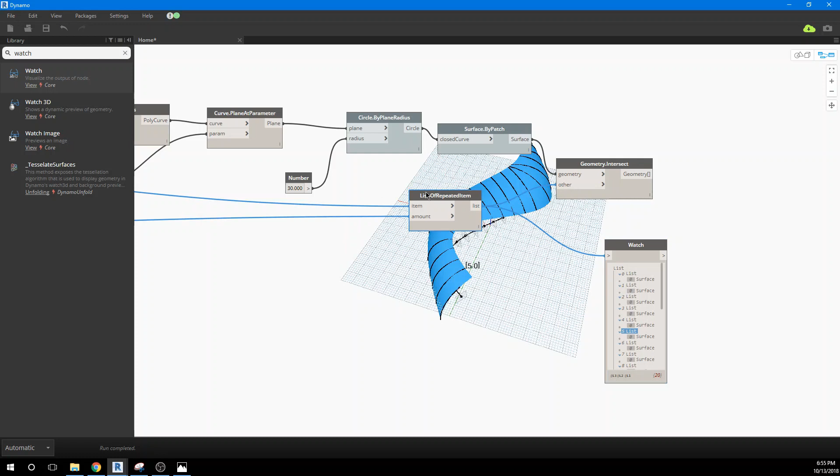Okay, so before we start making the beams, let's turn a few things off so we can see what we're doing here. Let me turn the surfaces off.

Want to get down to just lines. I'll zoom in here a little bit so we can see these. So now we have our ribs tracking relatively close to our surface.

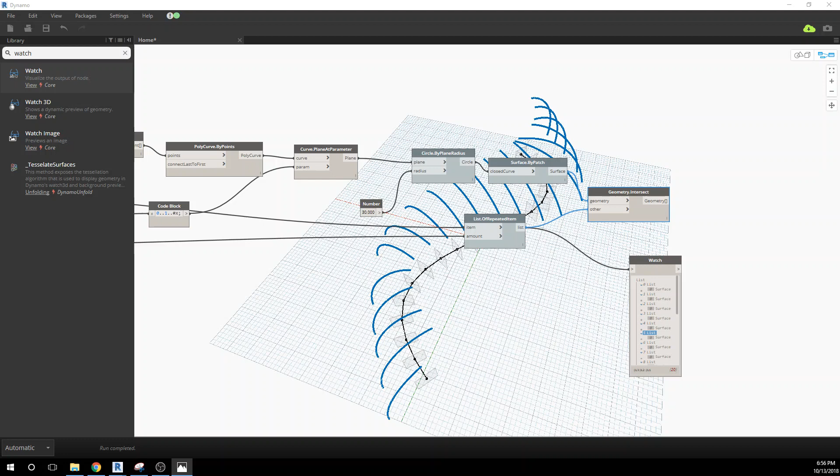And we want to turn those into beam elements. So if that's our intersected geometry, it's a curve, and we're going to now thicken it up. First, we want to have a little bit of control over where it sits with respect to the roof plane. We don't want these to show up in the roof plane, so we'll go ahead and offset them.

Let's see which one it is. I think it's this one. Offset a curve by a distance. So we'll go ahead and grab that geometry. Let's see, I don't know if this already has a default value of 1.

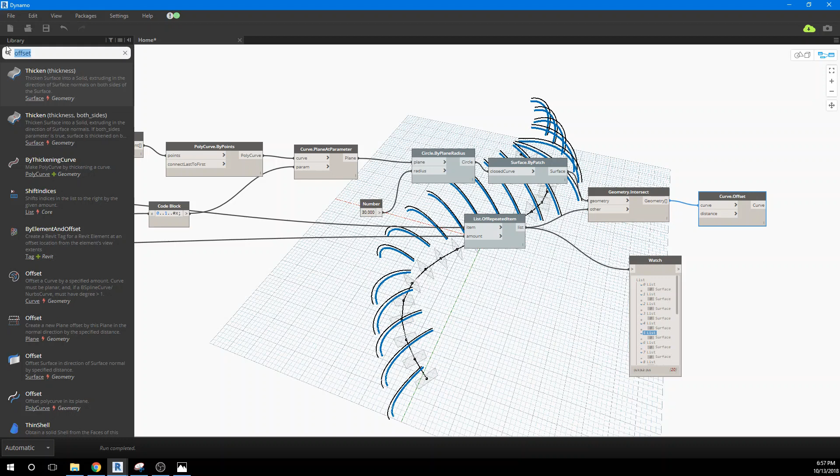So here's the original geometry, here's the new one, kind of a subset that would sit underneath that form if it was still on. And we're going to make it very close. I'm going to grab a number or just copy this one, and we're going to make this very small.

I think I did 0.3, could even be closer than that. And it'll move that line very close. We'll turn this line off now because we no longer need it. So that's our new beam coming 0.3 to what would be the defined surface.

And now we want to actually thicken this up. So we can do this a variety of ways, but let's look at polycurve, and then thicken.

And I wanted to only do it one side, so I'm not seeing the right one. I have ThickeningCurve. I'm not getting all the choices I should here. Let me think what I got to add to this - polycurve.

I'll do it by... thicken. Thickening curve, sorry about this. And I'm not getting the option for both sides. Oh, wait a minute.

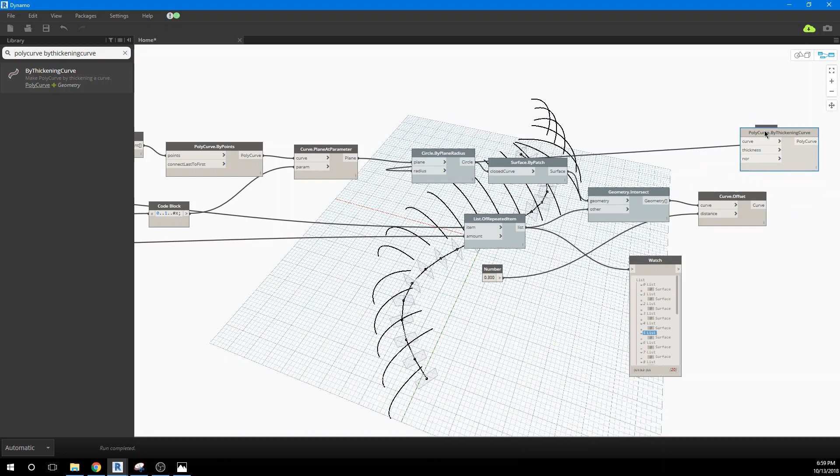It does give you a normal. I'm sorry, I probably had the right one right away. It gives us a... no, it doesn't. Oh yeah, it does. It gives us a normal so we can go in a direction and a thickness.

All right, so I don't know why this got stuck on all the way over here. So let's take and feed the curve in here. Let's give it a thickness, copy a number over. We could make it 6 inches, 0.5 feet. And we need a direction, so we need a vector.

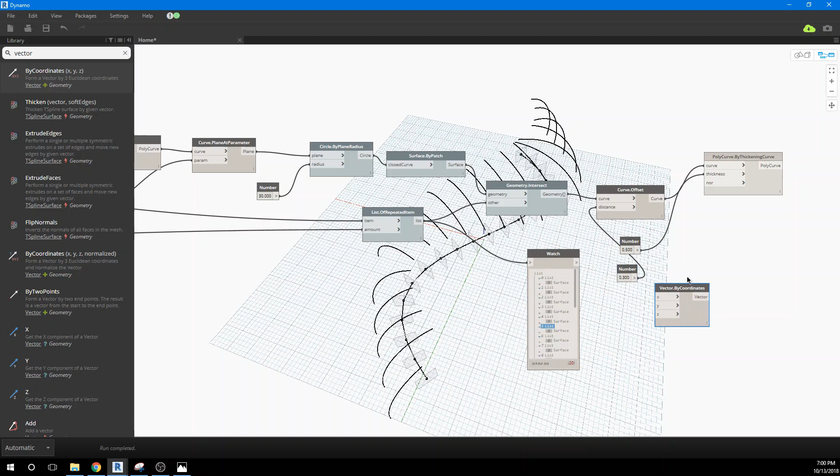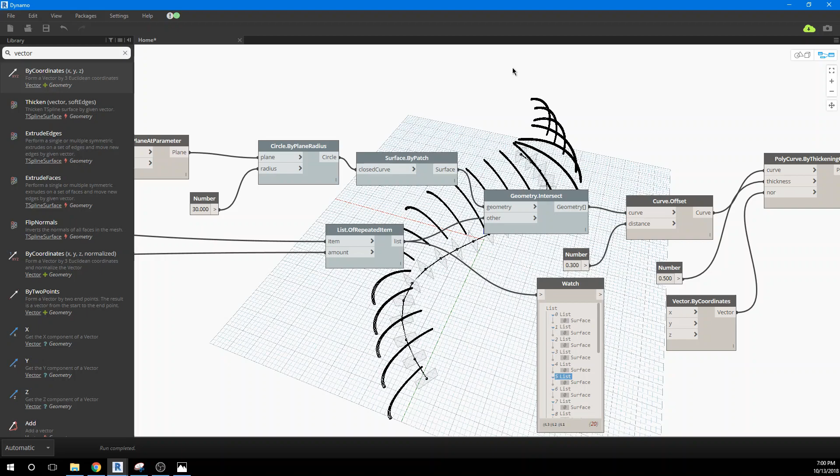I'm not exactly sure what we got here. Let's zoom in a little bit. So the polycurve is on both sides of the line.

That's a bit annoying, so let's just compensate for that for now, just so we keep moving through this. If you can think up a better way to define this - usually this thickening gives you both sides or one side, but I'm not finding that function.

So instead of this being offset by 0.3, we could offset it by 0.5. Well, we're actually going to be offset enough - if I was to show the form, it probably won't show through.

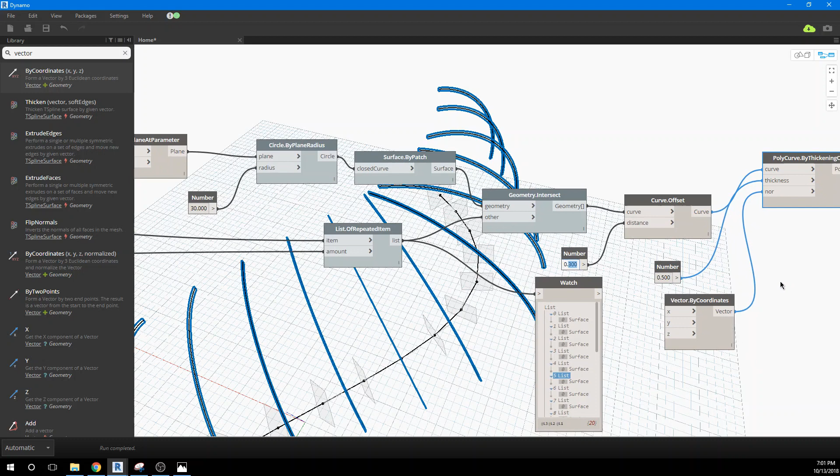I'm going to just leave that for now, just so you realize that the polyline - let me just zoom in here - the polyline we're creating is just extruding up and down, and we put it 0.3 away, so there's still some clearance for the form. So if our ribs are actually showing through, we know how we would compensate for that.

So we have a thickened curve, and now we want to just make that a surface. So we'll do a surface by patch.

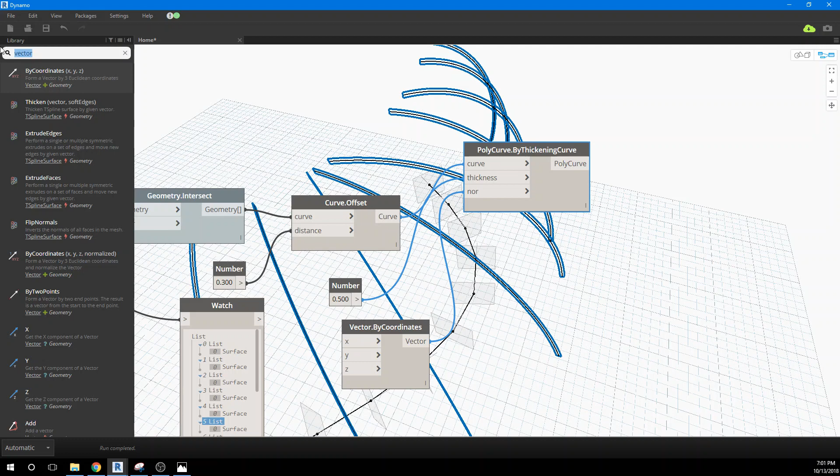Now that's a solid. Let's go ahead and start turning some of this off. Let's go back here and get rid of things we don't need to see.

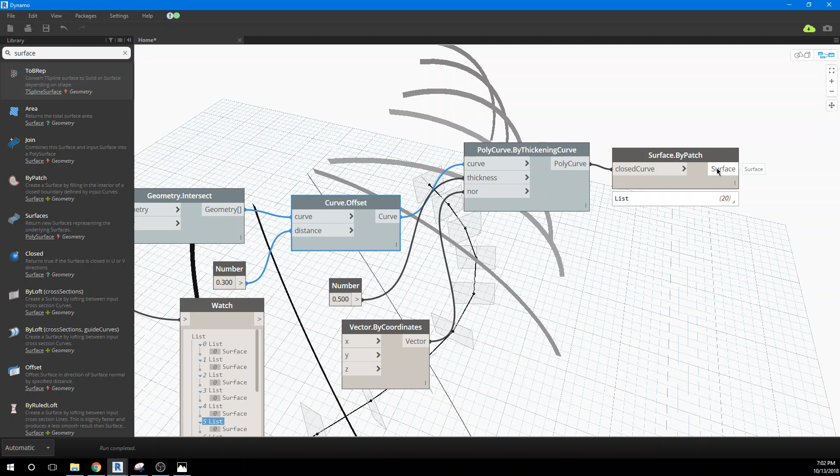Now we have that thing as a thin 6-inch piece of rib, and it's a surface, and then we can thicken a surface also.

And this is where we get the option for both sides on this function. So we'll plug the surface in, and I think that'll run it right away, and that'll make it a default of 1 foot thick.

So we want to actually make a smaller number for that. So we'll go ahead and copy over, and we'll make this 0.2, which would be a couple inches, basically, a little under a couple inches.

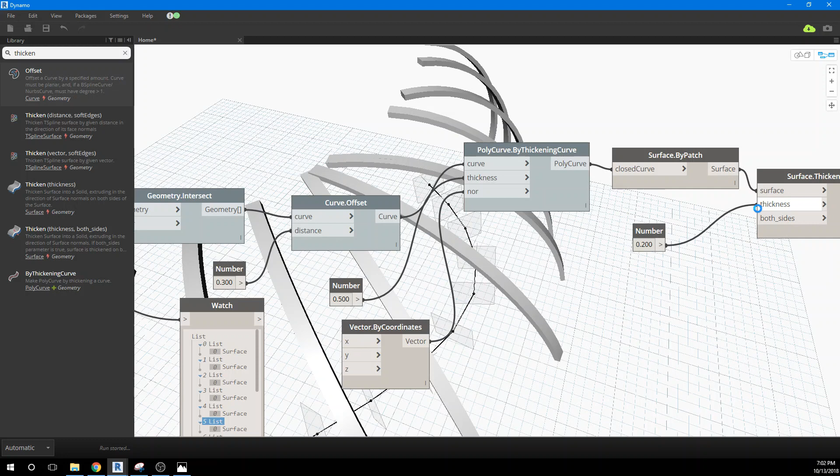Now we have our ribs turned thin, and we want to make it so that it's on both sides, and see what the default is. It's funny how this number thing just jumps over when you click on it again - it's a glitch. And it's true that it's on both sides, so we don't actually have to create the Boolean input for that one.

Okay, so actually we've actually created now all the ribs for our structure. The next thing we want to do is start to look at creating these purlins, or the cross members for that. And we're going to use some of the same geometry.

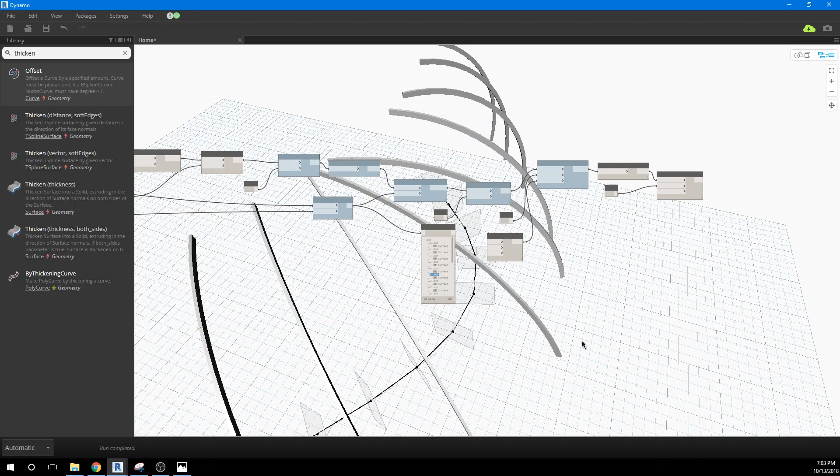What I might do here is let's turn the beams off. I'm going to turn the beams off for a minute. And I want to turn it back on where we have this geometry intersect, because that's just a line.

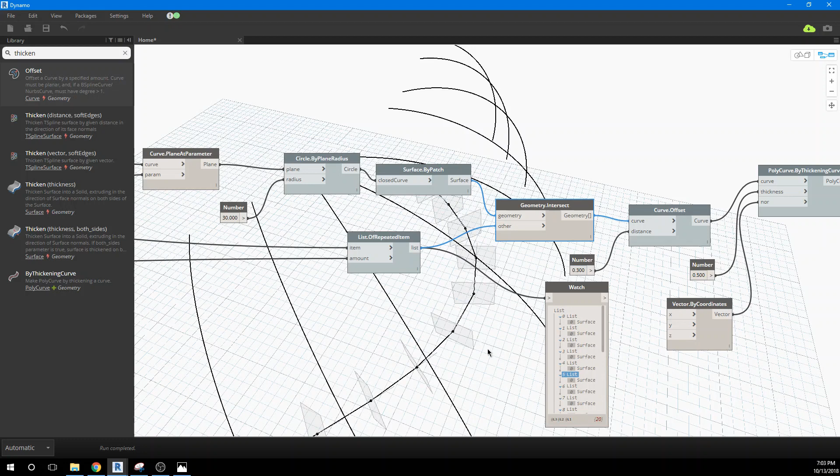Okay, so that's the geometry that we're going to use now to create the purlins. So we're going to do another curve offset just to get them away from, just to get some control over that. And I'll just repeat using this element again.

Actually, I'll grab all of these. I'll grab these two, and I'll do copy and paste, and slide these down.

And I'll preview this. I'll turn this one on now. So we're seeing those are just down there. That just gives us a point, it gives us a little control over making sure that where they sit with respect to the beams that we construct.

And I can turn off this geometry now because we no longer need it. This is our reference geometry that we're going to divide up in order to create our purlins.

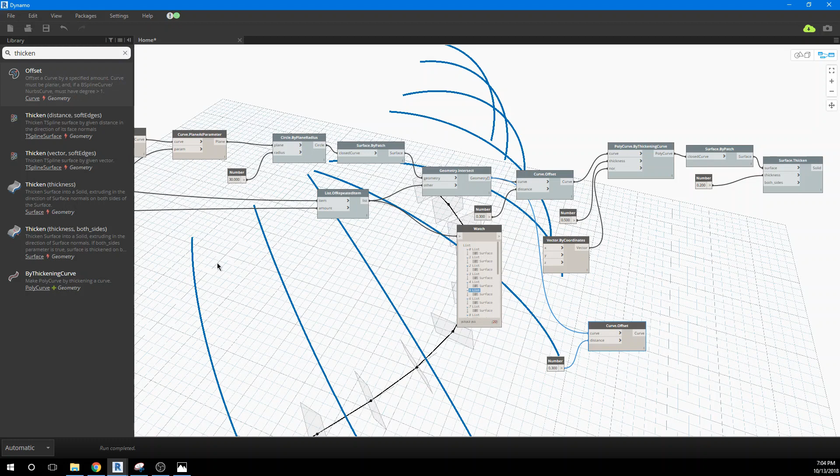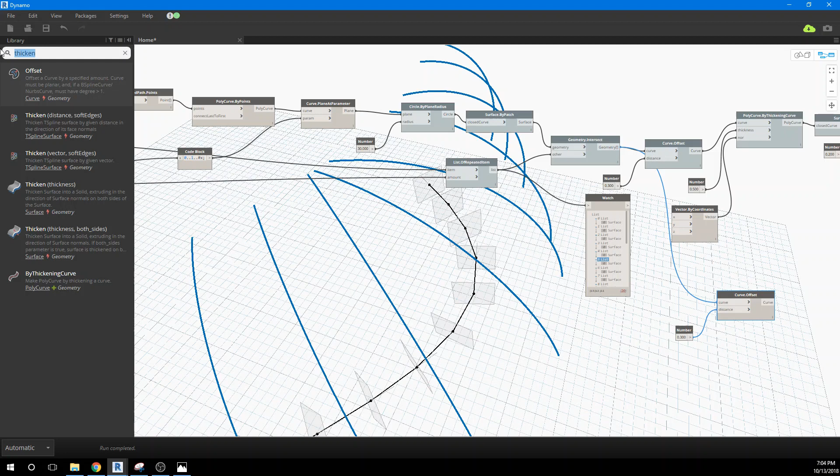So we're going to do a curve points at segments. I don't know if we still have that up here. No. So let's grab...

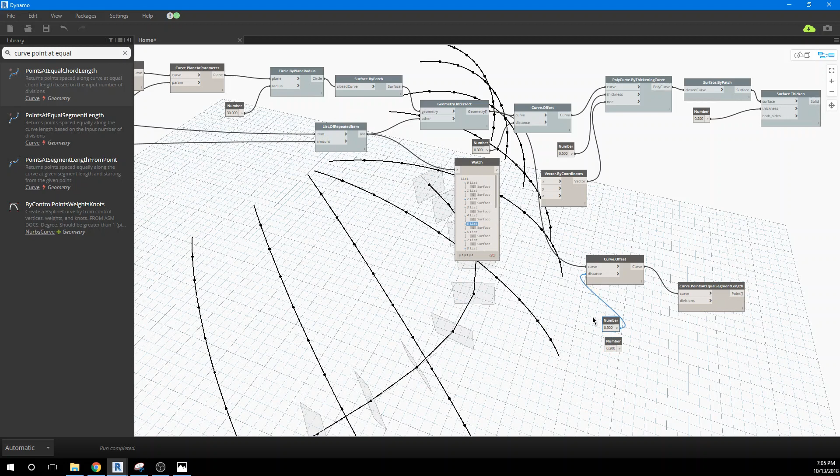at equal segment lengths. And so the idea here is we're going to stick the curve in. We're going to grab a number. And it did that glitchy thing, so I'll go back over there. And I think I made, for this one, I think I did 6 divisions. That'll give us 5 points.

All right, so the default is 10. I'm changing it now to 5 points. 1, 2, 3, 4, 5. And that's 5 times 20 ribs is 100 points. So we have 100 points now.

And this is where we start to look at the idea of how we really want to connect rib 1, point 1 with rib 2, point 1 with rib 3, point 1. We want to make these purlins go all the way across. So this becomes a manipulation of list in order to get our organization oriented the way we want it. I don't have a better way of saying that right now.

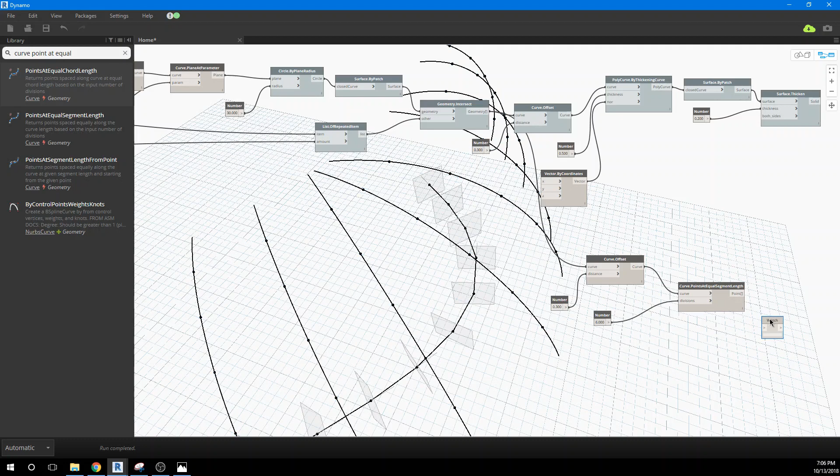Let's take a look now at what comes out of our data. I'm going to grab this watch box. I'm going to pull this over. And what we have is we have lists of lists.

Each list has 5 points, 0 to 4. So 0 is included as like 1. So 1, 2, 3, 4, 5. And we have 20 lists of those.

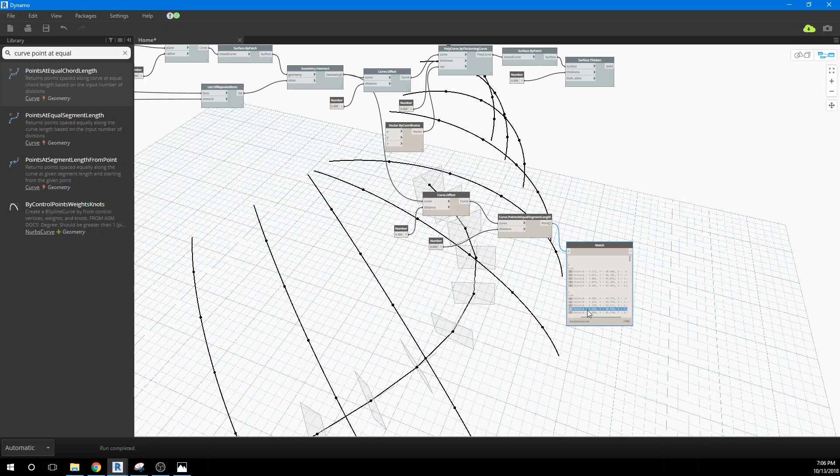So each one of these, if I click on one of these, I don't know if it'll show up on the screen, but that'll highlight one of the points in our system. Let's see if we can just back up enough to make sure we can see them all. So there's that point I have highlighted.

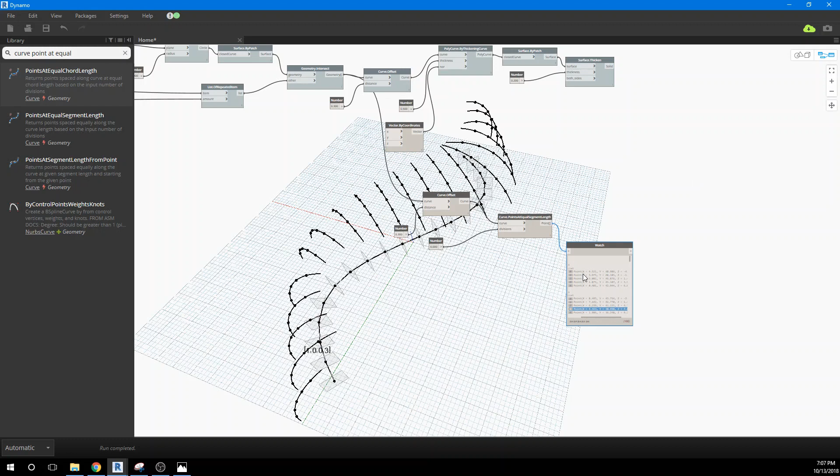So if we went through, and you see as we click through this, we'll get every point on each rib. And what we really want to do is be able to connect this point to this point to the next one down. So we need a way of parsing through our list in order to get the elements that we want. And so I've come up with a strategy to do that, and it's maybe not the best way, but it's a way that I could understand as I work through this project for the first time.

So I'm going to take this list and flatten it down right away. So instead of having a list of lists, I just have one huge list.

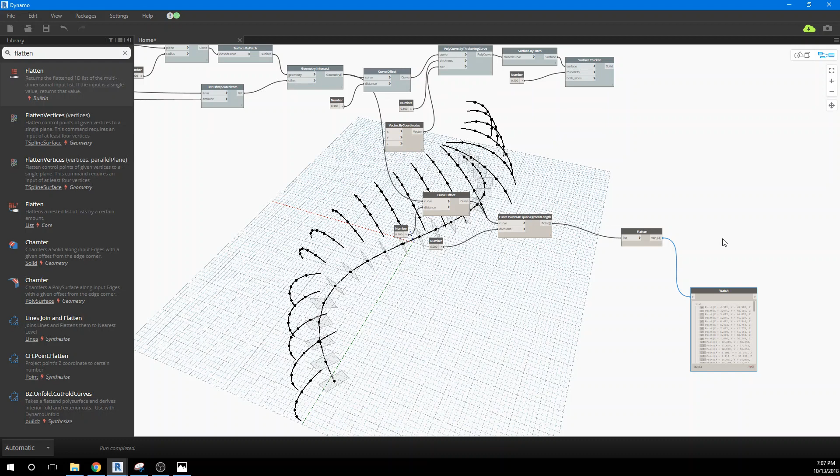So now I have 100 points. Let's zoom in here a little bit. It's the same thing though. If I grab this point, I get the first one, and if I go down to the 5th point, I get the next one in the series. If I go down to the 10th point, I get the next one. So I have to step through every 5 numbers in the list to get all the ones coordinated to be that element.

So there's a few tools for that. I can take every item out of the list at a certain position. I'm going to do a list take, it's called list take, every nth item. So I'm going to plug the list into that, and I want to grab every 5th item.

And so if I go through the list now, I've got every point through that whole list. So let's go ahead now and make a line out of it.

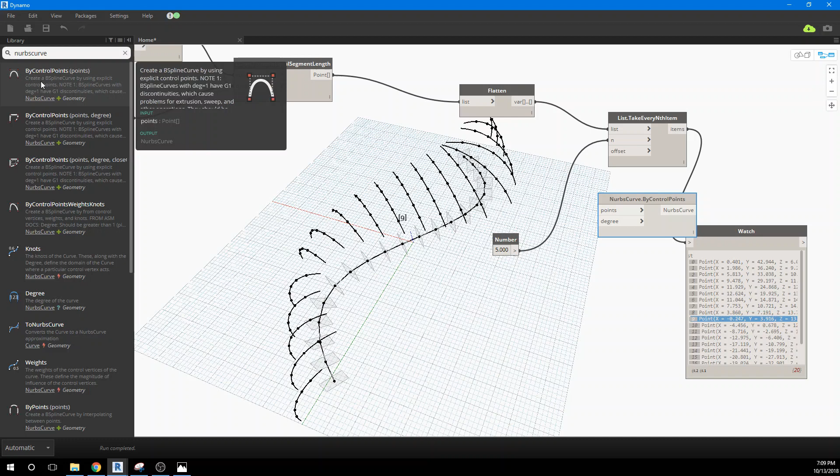We only have a list of 20. We flattened this list out, and we went through each 5 items, and we needed to go through and parse the next element, number 2. We actually need to go through the list 5 times in order to come up with each of the lines that we need.

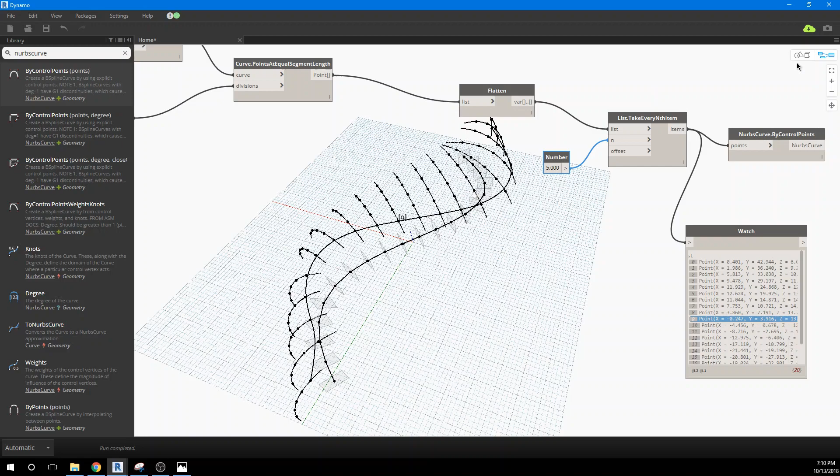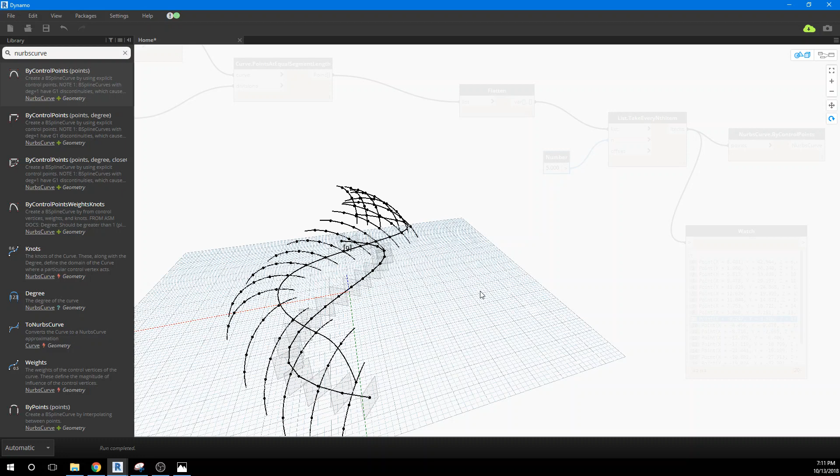So the way we do that is we grab, and let me just rotate this around. You see a static image all the time, it probably helps if you can see through. And this one is missing this point. This is NURBS by control point, so it's not exactly aligned with this because we're really severely trying to pull this one down at this element. So these aren't in perfect alignment. I'm also seeing something I don't like. It switches back over, well, it's got to do that. It switches back over the geometry on the other side, which is fine.

Okay, so we've got to deal with the idea of getting all the lines in now. And the way to do that is to actually come up with a list of lists, so we cycle through that offset. The offset being, right now it's taking the 0 item. We want it to take the 1 item, the 2 item, the 3 item, and the 4 item.

So the way we do that is I'm going to double click to get a code block, and we're going to go from 0 to 4, 5 times, because that's the number of. And if I plug that into a watch list, we get a list of 0, 1, 2, 3, and 4. So every time we go through the list, we're offsetting the one that we select by an increment of 1. So now if I plug this into the offset, we get all 5 of our lines appearing.

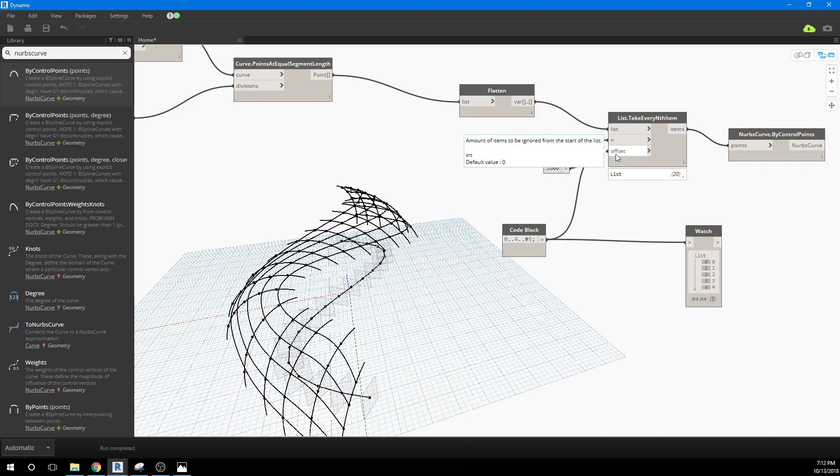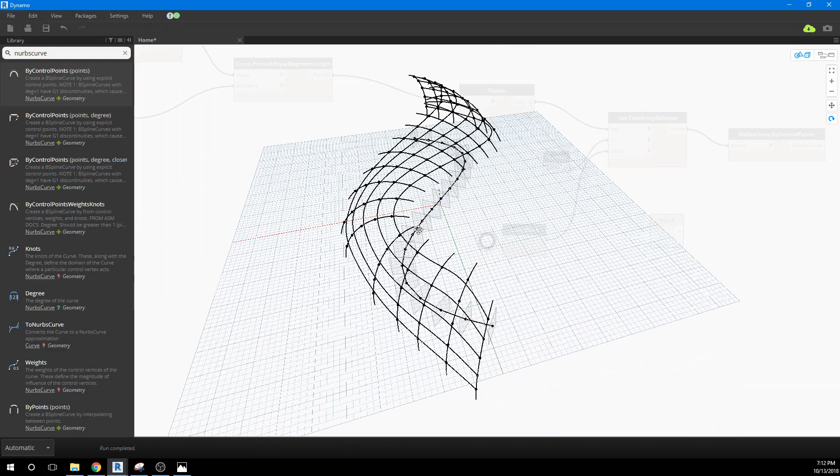So let's just take a look at what we've got now. So now we have our geometry, in both directions. And in some ways, if you think about this, what we actually have is we've divided this off into UV space. So this is kind of like looking into what a node might be that divides things off into panels and points.

So let's go ahead now and keep moving forward. I'll actually end this clip now, and we'll go back and go through the idea of thickening these curves up to make the purlins out of them and turn the other curved beams back on again. But we'll do that, like I said, in the next clip.